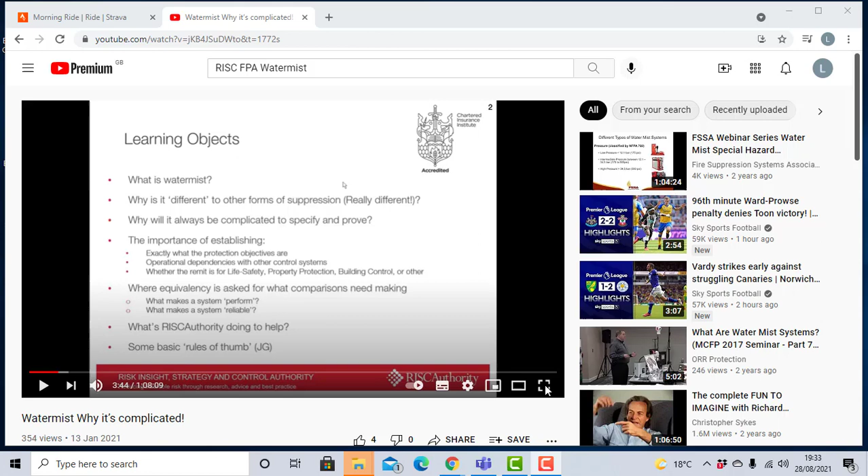Requirements for the certification. We're going to go through what is Watermist, why it's different to other forms of suppression, and I hope if you take nothing away from this, it'll be that. It really is different in the way that it operates, and that really underpins why it will always be complicated to specify and to prove.

Also, the importance of establishing exactly what protection objectives are, operational dependencies with other systems, and how your selection might be influenced by whether you're looking for life safety, property protection, or some other remit to fulfill. So often we see this being left out. People put in a suppression system or an extinguishing system without actually really thinking about what needs to be left should it ever be required in anger.

We also need to address the issue of equivalency, and this is because when we look at our building regulations and how some suppression systems are referenced, often they will cite sprinkler systems and ask for equivalency if a different type of system is to be used. And that's very important, specifically for those who are protecting the built environment and particularly for life safety objectives.

Now, RISCAuthority put in a lot of work trying to clarify the situation for people. I'll go into that, and also provide some basic rules of thumb. Now, these are really things which people may disagree with, but we found that they hold true when trying to specify good systems.

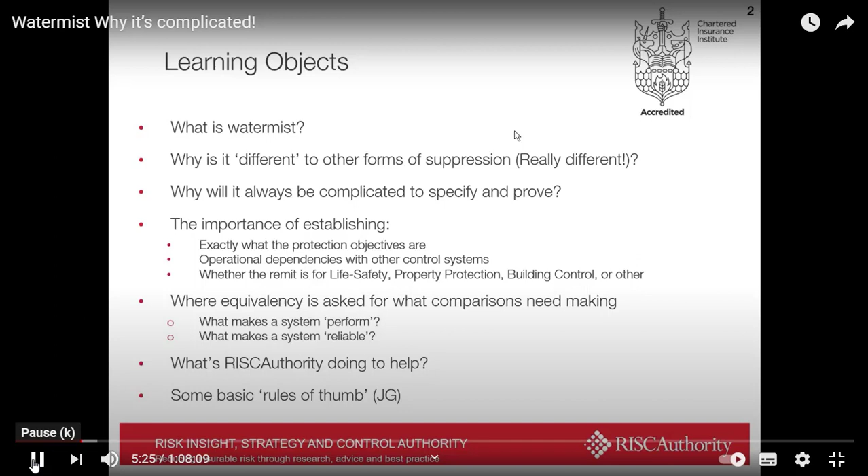So I'm not going to go into the details of this, but what is Watermist? Essentially, it differs from things like sprinkler systems because the water droplets are very finely divided to be much smaller. And in doing so, that gives them an amazing surface area for the exchange of heat and mass over. So if you want to change a lot of water into steam very quickly, the first thing you do is to cut it up as fine as possible and make it available for boiling off. And this is the difference between really a water mist system and a sprinkler system.

In order to achieve this very fine subdivision of particles, generally these systems might operate at much higher pressures than other traditional water systems, and for this you might use compressed gas or high pressure pumps.

The mode of operation is generally described as two-part, thermodynamic cooling of gases during the evaporation process of water into steam, and oxygen reduction as this steam displaces oxygen from the compartment. But many other factors will also come into play, and really that I'll show you in probably more detail than is healthy during the course of this talk.

These systems can be implemented in a number of forms. Traditionally, they've been what we call deluge systems, where the heads will not have a sprinkler bulb in them, or will not have a glass frangible bulb in them, but will actuate on an open pipe system when the pump is switched on. And these can be operated on a compartment or local application protection.

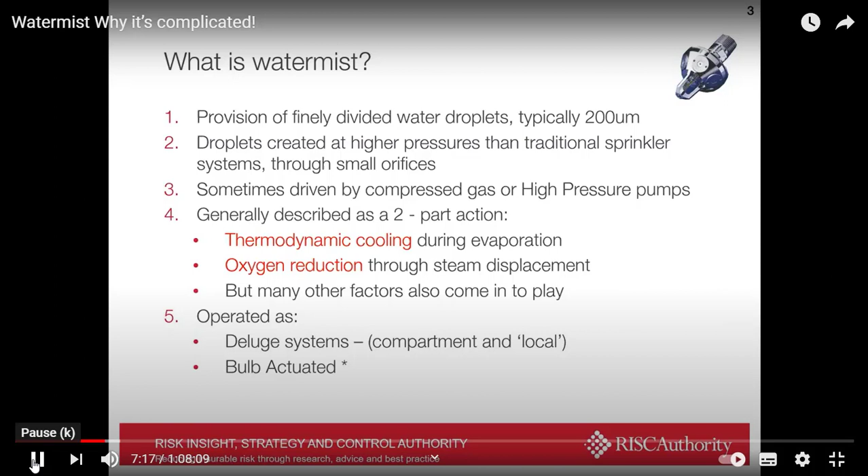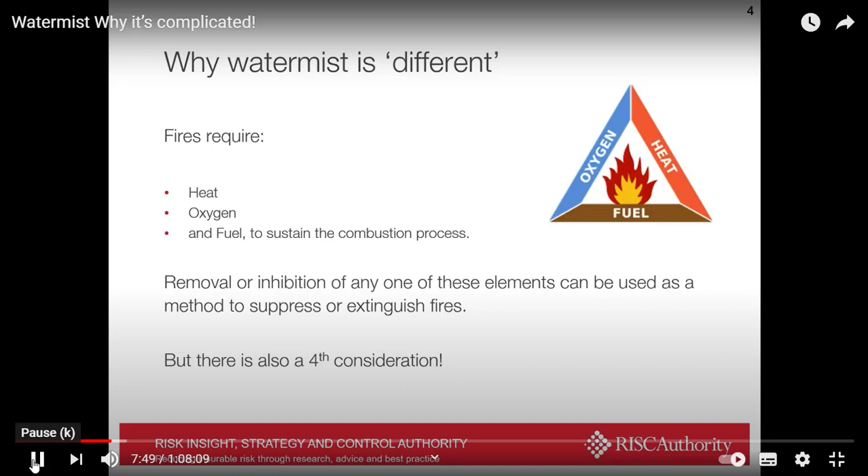And so any suppression system that comes to the fore is going to act on one of those. But it's actually a little bit more complicated than that, because we also do need to consider the chemistry of combustion also. So you may be more familiar with the fire tetrahedron. And really this is about interrupting the chemistry of the combustion process itself.

So whilst we might be used to our O-level chemistry telling us that hydrogen and oxygen mix to make water in a simple equation, in actual fact, it takes place as a series of steps where bonds are broken and remade between the various compounds that are involved. And while they are in this heightened state of being split up, they form free radicals. And in suppression terms, there is an opportunity for other molecules to be introduced, sort of to steal these, so the chemistry of combustion can't complete.

And this is probably most familiar action that we'll move on to think about of some of the gases which have historically been used for fighting fire. So we can really address fire by tackling limiting it of oxygen, limiting it of heat or fuel, or interrupting the chemistry of combustion itself.

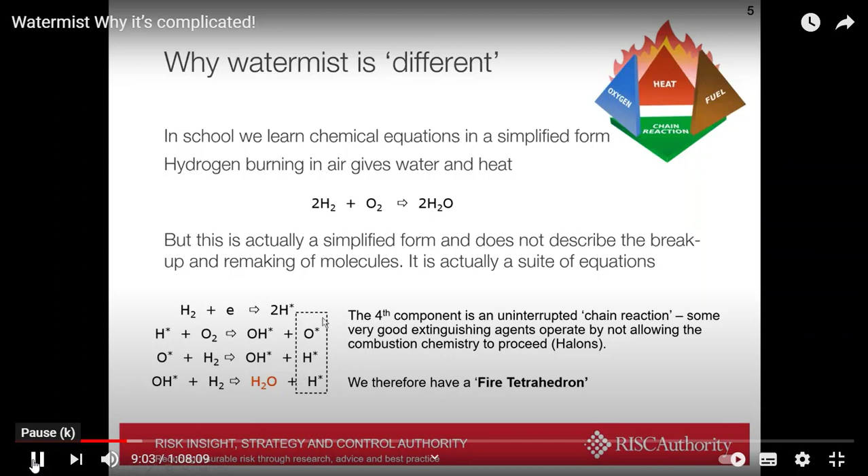Now, I thought it might help to understand how Watermist works by first looking at other suppression systems very quickly, with the popular ones being sprinklers, inert gas systems and CO2 systems, chemical gaseous agents, and the traditionally used gases such as Halon 1301, and this may help us understand a little bit how Watermist works in its own right.

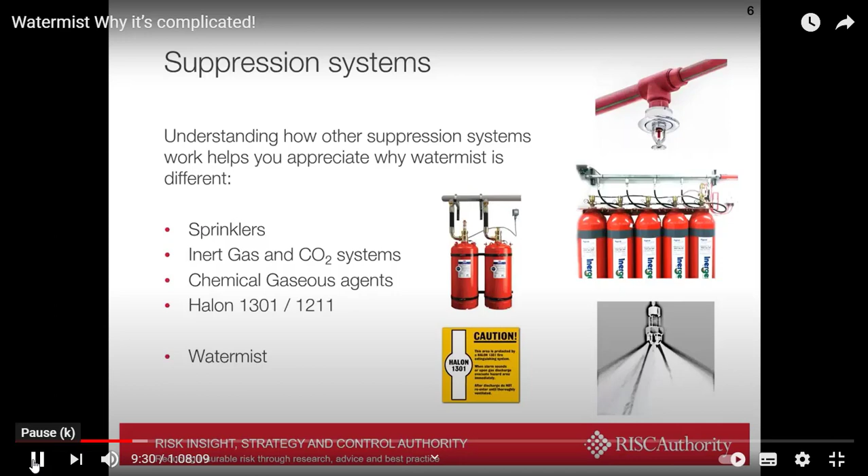So, looking at sprinkler systems, often people are slightly confused about how they work. We're very used to thinking we put water on fire and the fire goes out. But actually, when it comes to sprinkler systems, generally they are fuel removal systems, and generally what they achieve is making stuff that would normally burn, not burn.

So in the case of solid fuels like cardboard, dry cardboard is a fuel, wet cardboard isn't. A lot of sprinkler protection is about pre-wetting the fuel that could soon become involved in a fire, and that determines how water is discharged from them.

Now, if you're protecting some liquid fuels even, this can still apply. Alcohols with water, at a certain percentage, they will burn, and below a certain amount of dilution, they will cease to be able to be combustible. So dilution of alcohol fuels to the point where they become non-combustible still classifies as fuel removal.

And for other types of Class B fuels, fluids like petrol and diesel, again, additional chemicals can be added to the water entering the sprinkler system, such as firefighting foams, which essentially will render the fuels non-combustible or separate them from further participation in the fire by a physical barrier, a skin, or a frothy layer, if you like.

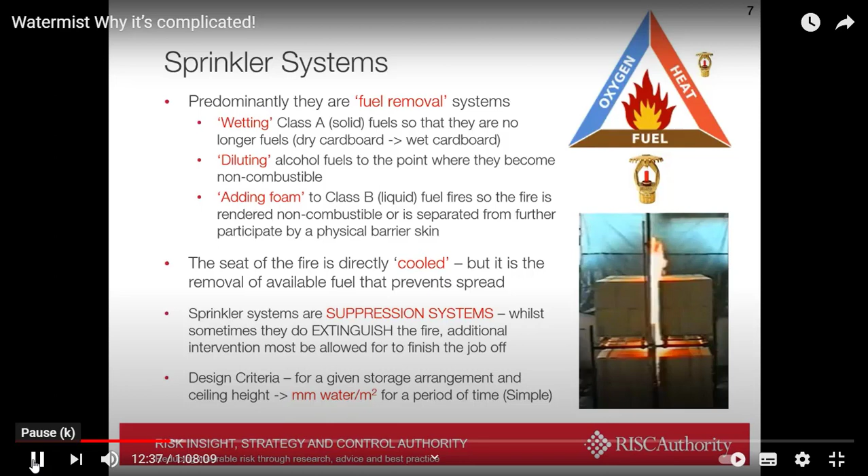We look at the equivalent for gaseous systems or inert gas type systems. These are oxygen removal type systems, where the inert gas displaces around 40% of the enclosure's volume, leaving a residual oxygen concentration that doesn't sustain combustion, and for typical sorts of fuels, that will be somewhere around 12% oxygen and below.

There is some slight variation in the performance of the different gas mixtures, because when you introduce additional quantities, or when you change the makeup of air, it transports heat differently. So there are some differences in performance between the inert gases, but they are very minor.

Now, gaseous systems can't really be suppression systems. They need to extinguish the fire in order to fulfill their remit. And for that, obviously inherent in the design will be precise control over the environment in which they operate. So we need to ensure that the compartment is sealed so the gas doesn't just dissipate out, and we need to ensure that at the time of discharging the gas, we don't destroy the enclosure.

When you inject these gases, if 40% of the compartment's volume needs to exit, it needs to do that in a means which is controlled to an appropriate location and doesn't raise pressures inappropriately. And then having discharged it, there needs to be mechanisms to seal the enclosure and ensure that you can hold on to that gas quantity.

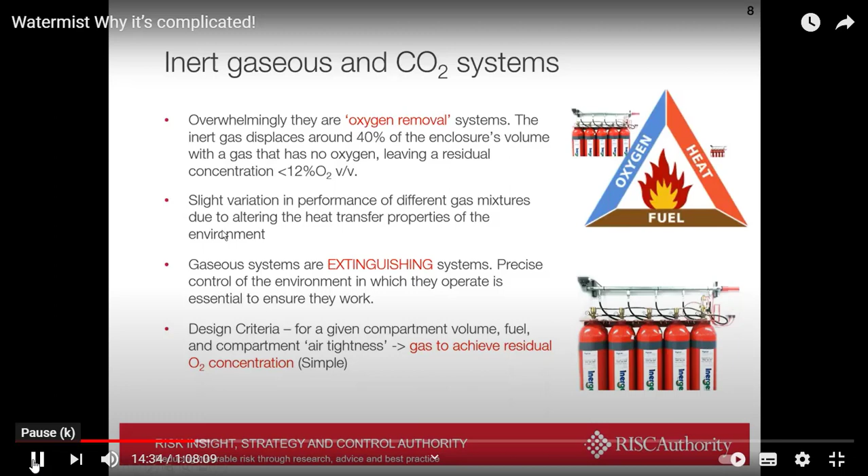So very straightforward. A little more complex with chemical gaseous systems. These are, if you like, gases which are almost like a gaseous version of water in that they can remove substantial quantities of heat by breaking down chemically within the fire. It's a highly endothermic reaction, and there are reports that some of these chemicals also inhibit the chemistry of combustion. Popular trade names that you might have heard of these types of gases might be FM200, FE13, NAF S3.

Many are becoming slightly less desirable due to the greenhouse gas contribution that they can make. But these, again, are extinguishing systems. They need to extinguish the fire in order to fulfill their remit.

With these systems, because generally they are fluorinated compounds, if you don't extinguish the fire with these types of chemicals, it can lead to massive production of hydrogen fluoride, which is a very toxic and damaging gas—something which is highly undesirable. But the design criteria, again, is very simple.

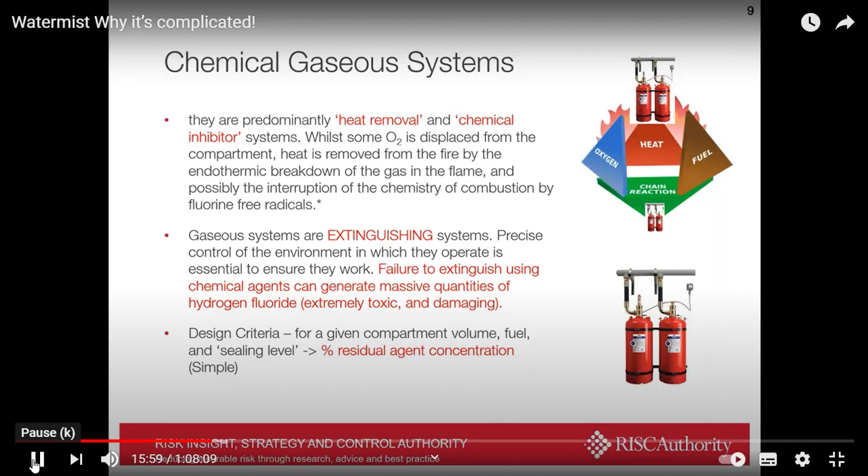For any given compartment volume, fuel, and sealing level of the compartment, you're just looking to get a residual agent concentration of a certain value. So again, very simple design too. And just for future completion...

Halon systems. The halon breed of gases were highly revered chemical inhibiting agents, which in terms of efficiency and performance at putting out fires were quite unsurpassed in their capability. They are, of course, now outlawed under the terms of the Montreal Protocol because they're ozone-depleting gases.

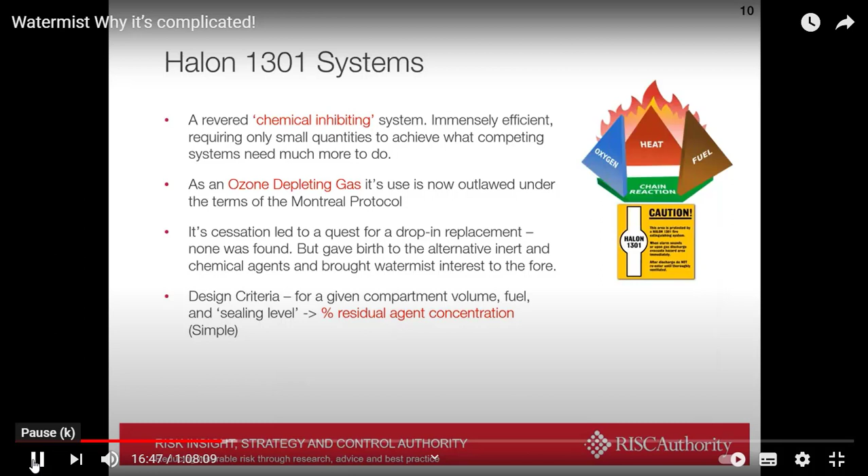And it was their cessation that really led to the development of the other type of gaseous systems which we've just talked about, and also gave birth to really increased interest in the use of watermist, and prompted a great deal of research into this. Again, the design criteria for halon was very simple. So what about watermist?

Perhaps it's best described as though it's an inert gas system, but in this case, the inert gas is steam, and that must be created by the fire itself. Actually, it's this complexity that makes this different from any other extinguishing system, because how it works, how well it works, and the way in which it works is driven by the fire itself—and not just by the fire itself, but the relationship that the fire has with the enclosure that it's within.

Really, scale becomes a very important factor here. A big fire in a small compartment might behave very differently to a small fire in a very big compartment. And even during the life cycle of the fire, these properties can change as the fire grows and shrinks.

Now, in sealed environments where the fire and geometry allow it, it is most certainly an oxygen removal system, and you can achieve great things where the steam displaces oxygen from the enclosure until combustion can no longer be sustained. It can be an extinguishing system, but this can be very difficult to ensure due to the level of control that you need over the environment and how everything goes. But I'll demonstrate that very clearly to you shortly with some results from some experiments that we conducted to demonstrate these points.

It's obviously a very effective gas cooling system. We mentioned before that it was very finely divided droplets delivered universally throughout the compartment. And in that, they can be fantastic at preventing flashover, keeping things cool, and keeping the environment well suppressed. But the design criteria, for the reasons given, are very complicated.

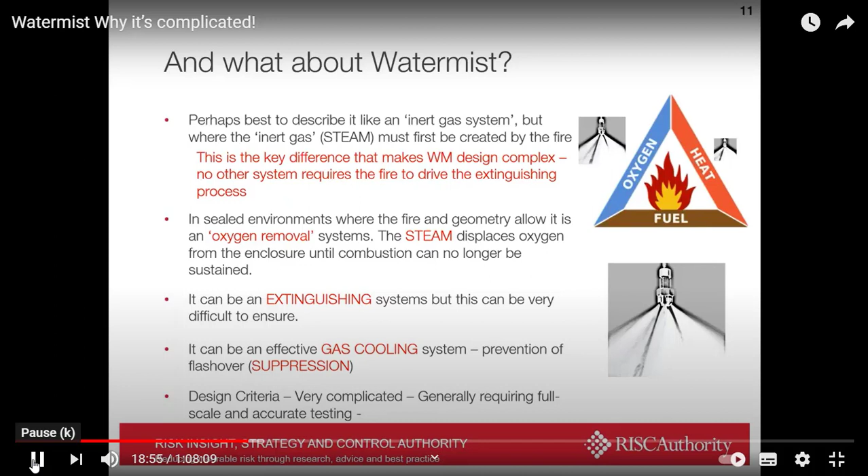And historically, watermist systems need to be justified really by full-scale, and more importantly, accurate testing of a type reasonably similar to the end application.

So if anyone sort of asks about, how does it work? Is it by oxygen depletion? Well, sometimes it might be by cooling the fire, perhaps a little fuel removal if it's specifically designed to control ignition sources. Again, if that's something desirable, it can be designed in.

Deployment of foam—generally watermist systems are not foam enhanced, even though it'd be lovely to do that, because, as you'll see, small fires can be quite troublesome for them. But it can be made to work that way if deemed appropriate.

And gas cooling, very effective at that. But it can be all or some of these together individually, or even change throughout the lifespan of the fire as it grows and shrinks.

And actually, we do see that cycling of fires during watermist discharge is commonplace also, as a large fire can really drive itself to the point of its own destruction, or nearly, but then as it shrinks down, it starts to generate less steam, and then depending on the ventilation arrangements, it may recover quite considerably also.

But another common question: is it like a sprinkler system or a gaseous system? Sometimes all I can say is it's a bit more like one than the other. But again, it depends very much on the situation. The key difference is that the fire and its relationship with the enclosure drives the extinguishing process, and all these things vary.

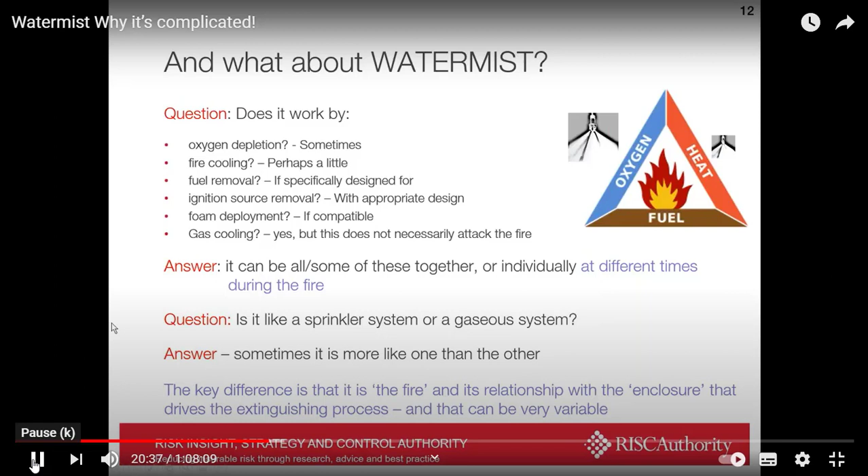So I said that I would give you a good example on some of these facets.

Here was a very simple series of tests that we did, but they were very well controlled in a 100 cubic meter enclosure, very well sealed rig, but we can adjust the ventilation by removing sections of the door panel, the blue blob on the left there with those dots, that's just a section door panel. We can operate with different numbers of Watermist nozzles, use a range of fire sizes, and allow the fire to burn for different periods of time before the Watermist system operates. Hopefully the results from this will show you clearly how counterintuitive some of the operating modes are.

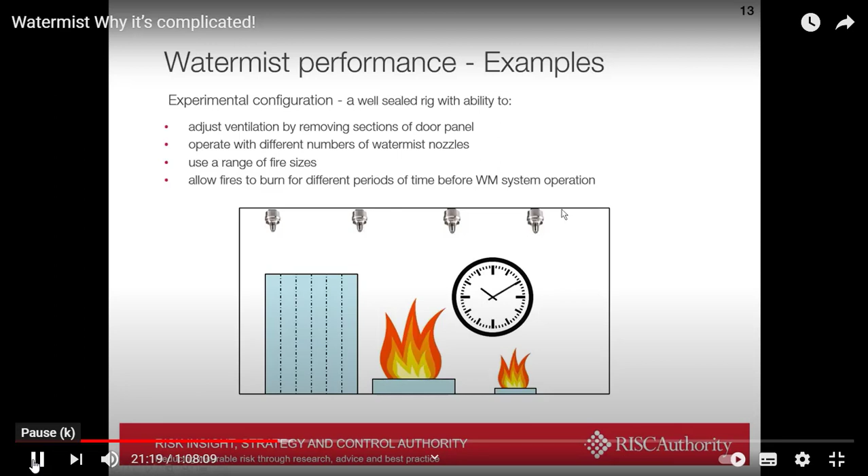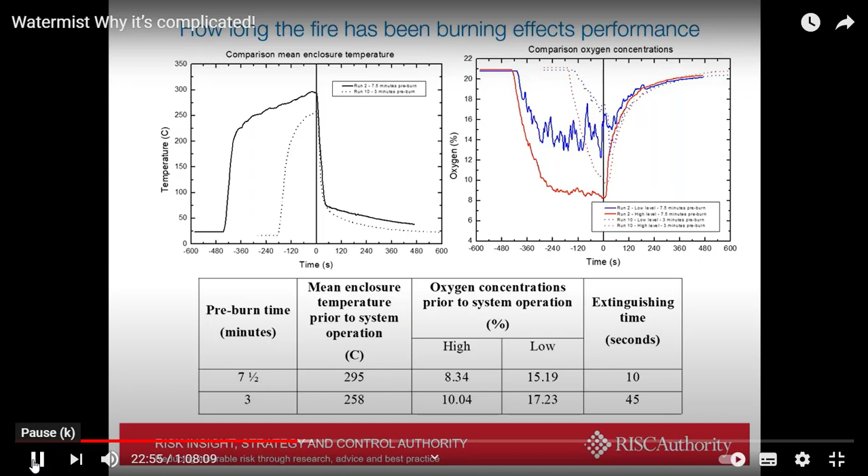When we activate the system, we see a difference in performance in the time to extinguish that fire. Burning the fire for longer, we extinguish it in 10 seconds, whereas burning it for a shorter period of time, it takes 45 seconds to go out. I think that's all very logical, but again, counterintuitive. We're rather used to detecting and tackling fires earlier because they're easier, but here's a case where leaving them longer makes them easier for this type of system.

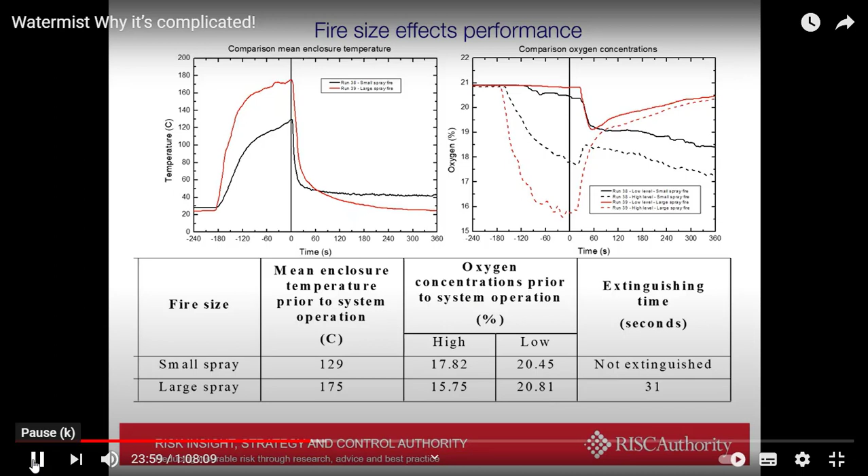And the difference here is not just a change in time, but for this ventilation configuration, it's the difference between extinguishing the fire and not extinguishing the fire. Again, this is a deviation from possibly what we're used to. We're used to systems which do not really behave in a sort of binary fashion - we like to see a change of performance, but not a major difference, such as whether it gets extinguished or not.

Ventilation, another key feature for systems such as this. We can see that they're inherently linked in their ability to put out fires to the oxygen content of the enclosure and how they can drive it down.

So here we have, if you can remember the schematic before, where I've removed a series of door panels - 2, 4, 6, and 8. What that changes between these tests is not only the temperature of the enclosure, because the fire burns less efficiently - you can see that in the left-hand graph, actually this is more about holding on to heat with the highest temperatures for the least panels removed. But more importantly, on the right-hand graph, it describes how the residual oxygen concentration within the compartment is for the different ventilation levels.

As we remove or increase the ventilation of the compartment, you can see the extinguishing time increase from 14 to 27 to 35 seconds, to the point when 8 panels are being removed, it doesn't extinguish at all. So again, we reach a threshold, and it's a question really of whether we would be able to describe accurately in any design manual when this happens, if extinguishment is an important facet of the overall design.

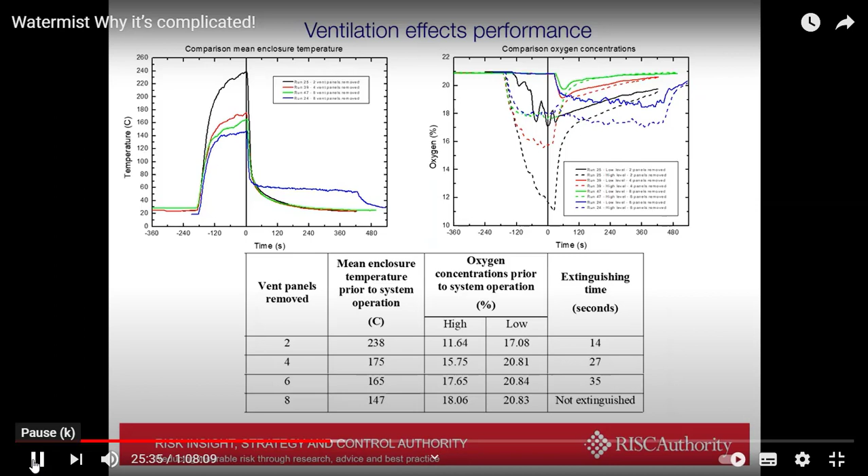And that's another thing that we need to discuss later on in this talk. People do seem to fixate on extinguishing fires, when actually that might not be what is needed at the end of the day.

Watermist density - I mentioned we can also change the number of nozzles operating within a compartment in this well-controlled environment. You can see as we changed from 4 to 6 nozzles on small and large spray fires, the more water you put in, the lower you can drive down the oxygen content of the compartment, and larger fires do that better. On a small spray fire with 6 nozzles operating, the fire will be extinguished in 52 seconds, but if it comes down to just 4 heads operating, we reach a threshold where the fire doesn't extinguish.

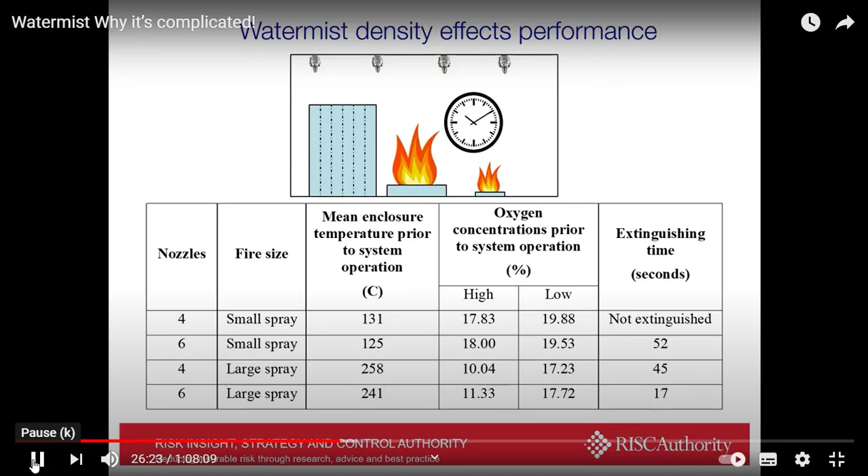Hopefully you've managed to get your head around that - it demonstrates just how confusing things can be. Fires that have been burning longer are hotter and have less oxygen available, and may therefore be easier to extinguish. Fires which are bigger are hotter, consume more oxygen, and generate more steam, so they may also be easier to extinguish. Fires with less ventilation cannot replace the oxygen displaced by steam as quickly, and may therefore be easier to extinguish. Fires subjected to more droplets can produce more steam, which may benefit extinguishment also.

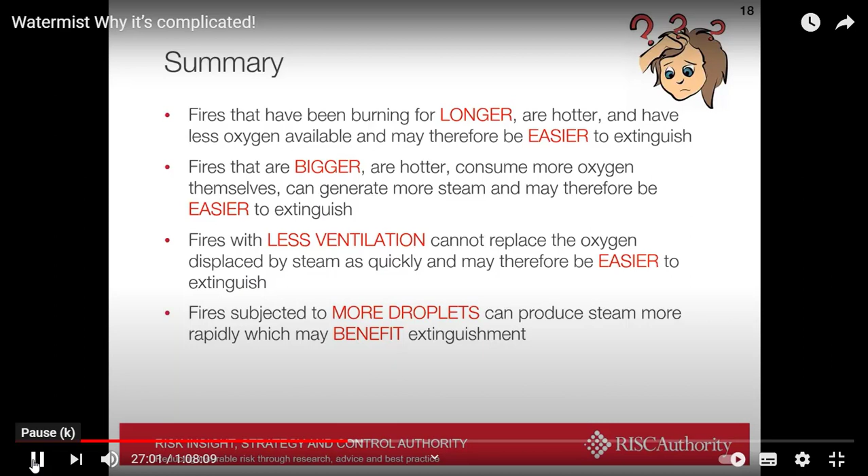The problem with criteria like this - longer, bigger, less ventilation, more droplets - is these are very difficult things to describe in any given design manual, because they are related to the fire size. A big fire is only big in a compartment in which it looks big. In a much larger compartment, it may be a very small fire. So it's this interplay that makes it very complex indeed.

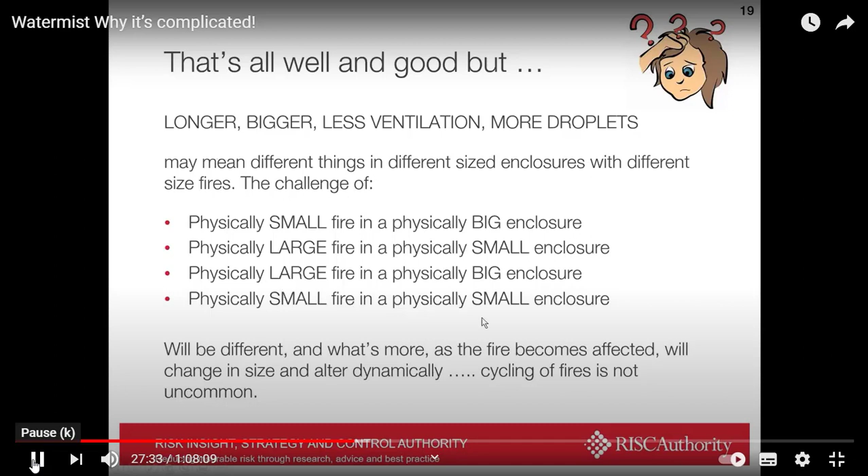I think we've probably laboured that point long enough. I just want to show you what this actually looks like in practice. This is some work we did for the military, and I just want to show you 3 examples - this was for a very specifically designed Watermist system for them. I'm hoping that this will run.

This is where it's worked beautifully in rehearsal. But we might be having a little problem now. Sorry about that - I may just have to describe these to you.

Basically, in a very large compartment, this was for a marine application - we designed a system for the military, for the warships. In the first video on the left-hand side, that should have shown you very nicely how hidden fires, under a metal table - these images are taken with thermal imaging cameras - a very large fire in a completely obscured situation. If the fire is large enough and the compartment is well sealed enough, that fire can be successfully tackled because of inerting of the atmosphere and reducing the oxygen to a point where combustion can no longer be sustained.

In the middle one, this is a small fire, but in this case the ventilation of the enclosure is such that the small fire will not go out by itself. But this particular Watermist system we enhanced with foam, so that gets taken care of by foam.

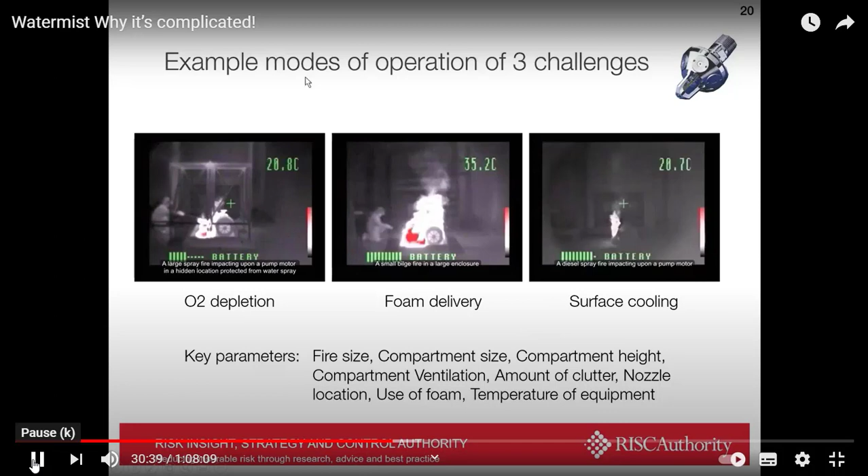I'm sorry I couldn't bring you those videos. And I also don't - oh, there we go.

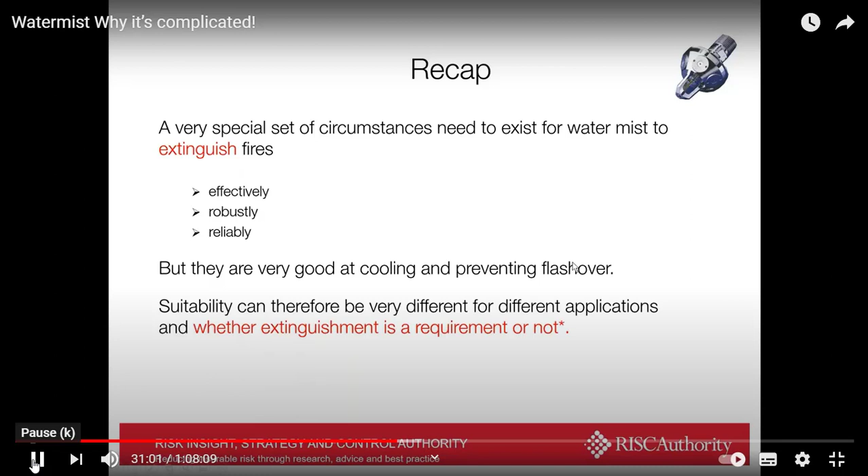So to recap, a very special set of circumstances need to exist for Watermist to extinguish fires effectively, robustly and reliably, but they are very good at cooling and preventing flashover. Suitability can therefore be very different for different applications, and whether extinguishment is a requirement or not. Now, we need to consider this very carefully.

Watermist is seeing a wide range of applications, some more familiar than others, but it's vital that you understand what it seeks to achieve. So I've just roughly categorized these as life safety protection, building regulations compensatory feature, property protection, and business resilience endeavors.

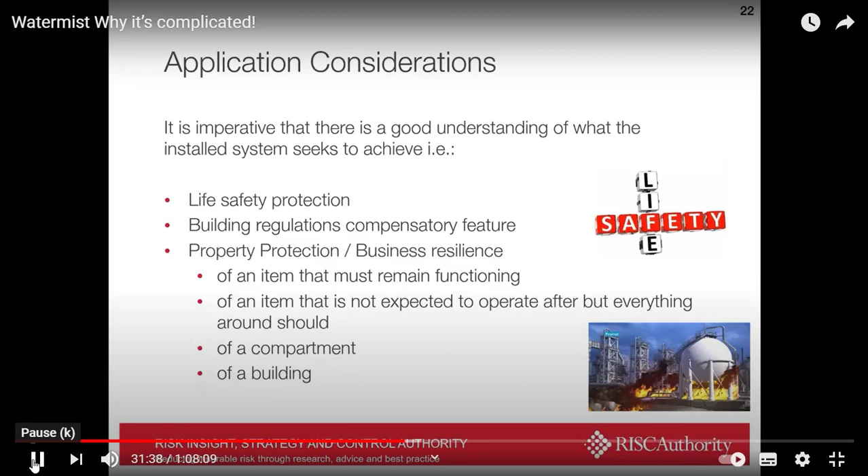And that might be of an item which must remain functioning, a local application if you like, or of an item where it may be destroyed in the process, but that's okay, as long as everything else around stays intact, or protection of a compartment or protection of a building.

Now, for each of these, it's imperative to also consider if extinguishment or suppression is appropriate, and if we talk about suppression, how long the system must be effective for. This is generally a conversation about who's coming up to help with it, the fire service, or what the secondary measures are to finish off the fire, and also how resilient the system must be to perform.

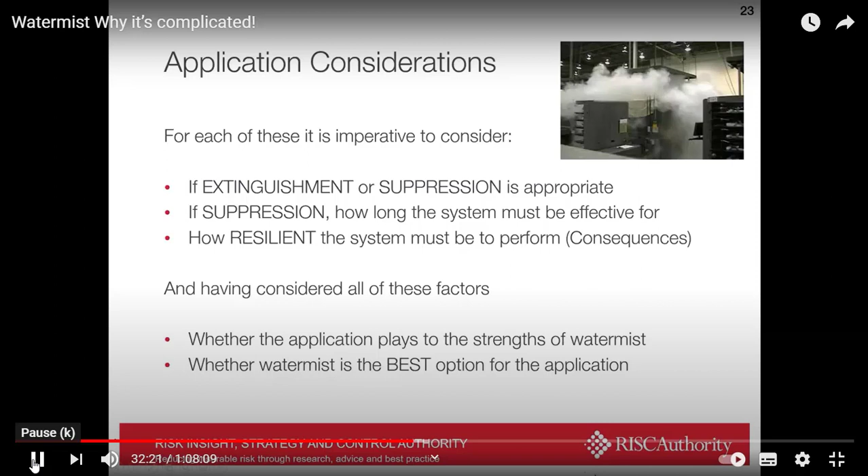And having considered all those factors, whether the application plays to the strengths of Watermist, and we'll talk about those in a moment, and whether Watermist is the best option for the application itself.

Now, I think hopefully you've started to get a good handle on what the strengths are of Watermist. Very good on high heat output fuels, and particularly liquid fuels, hot environments, enclosed environments. This optimizes steam production and containment of that steam for displacement of oxygen as well. Best for small compartments with low ceiling heights, because that can also maintain the momentum of the droplets themselves.

Around a fire, there are a lot of repelling forces to drive droplets away, and Watermist systems overcome this by generally injecting them in a fairly fast and furious fashion so that they can overcome these repulsive forces.

Certainly a strength is direct application, very good environmental cooling, and they can be good on hidden fires if the fire is large enough and the compartment small enough in relation to each other to globally reduce oxygen content, and they're very good at gas cooling.

The weaknesses: ventilated spaces, as hopefully we demonstrated there. You can cross a threshold so that a lot of the benefit disappears all too quickly. High ceiling heights, as I said before, where the momentum of the droplets gets lost with distance.

Small fires can remain remarkably resilient against water mist systems, because they don't have the energy to drive the circumstances for their own demise.

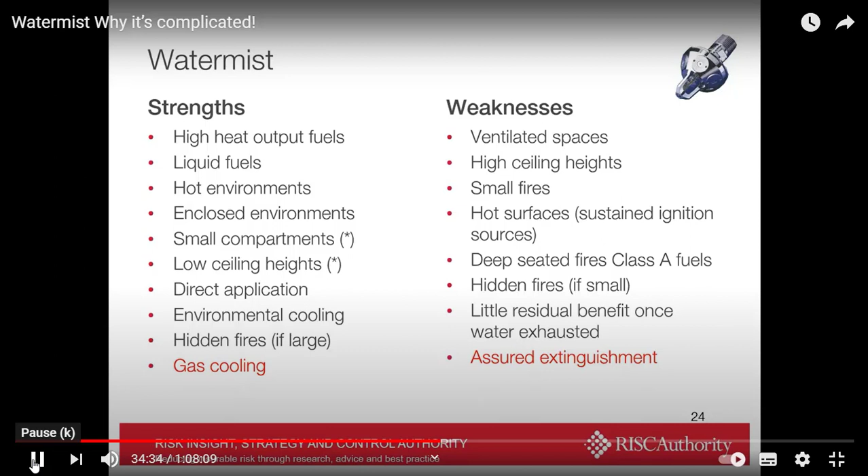Hidden fires, if small. Another thing to consider is that once the water supply to a water mist system is exhausted, there can be little benefit thereafter, because very small quantities of water have actually been put down. Their weakness is really that trying to assure extinguishment can be quite a challenge, and we'll keep revisiting that.

But that said, for life safety purposes, we've seen some very good implementations. We know that they have a facet of exhibiting excellent atmospheric cooling, very good for flashover prevention, and really preventing fire growth in small domestic residences.

An aid to timely detection and evacuation, and generally these are specified without an expectation or requirement for property protection, as extinguishment is not required. It's more about getting people out of the building, and they can do that very effectively indeed.

And obviously, post-Grenfell, they've been proposed as a good measure for assisting the escape of occupants who can be quite remote high up in high-rise buildings, and we've seen some good examples where that certainly is a feature.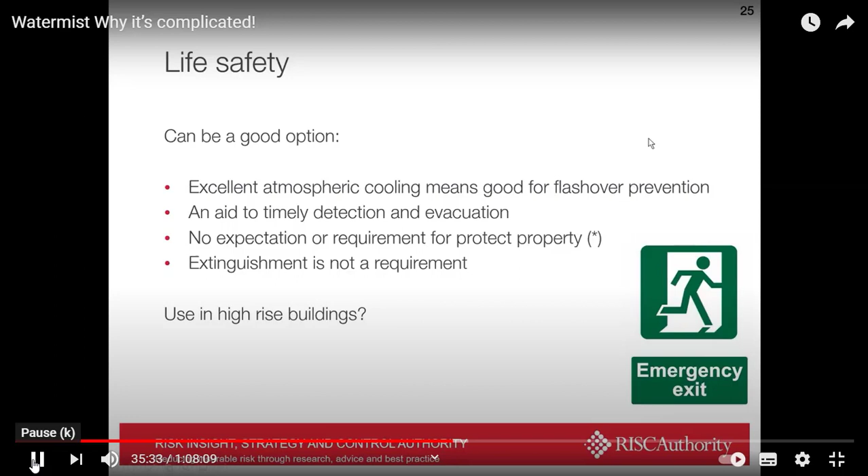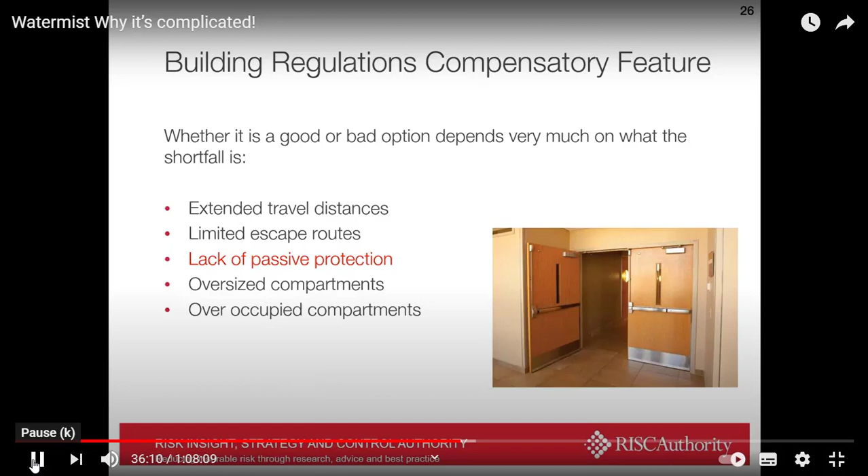I think decisions as to whether water mist is appropriate here really depend very much on considering each of those in turn for appropriateness, given the strengths and weaknesses of what we've already discussed. But I won't dwell on those—it's a very complex area in its own right.

And the reason there is quite obvious. In the marine environment, we have very well-sealed compartments. The fuels that they use generally lead to very large instantaneous fires, and it all plays to the strengths of water mist, as we've seen as being very effective.

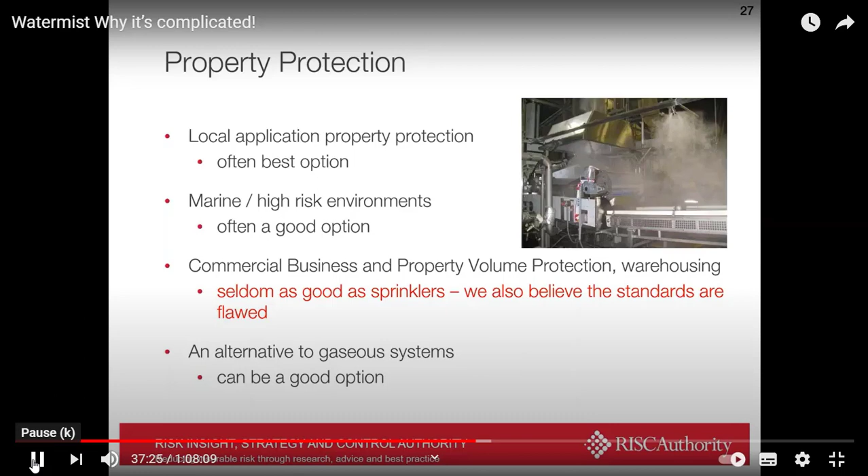And this is where we see most challenges, and often we see facilities being put in where sprinklers really would have been a better choice after all. I'll go on to some of the reasons for that later on. But certainly they can also be considered as a practical alternative to where gaseous systems might be deployed. They can be a very good option, subject to the fires being of the right type to play to its strengths.

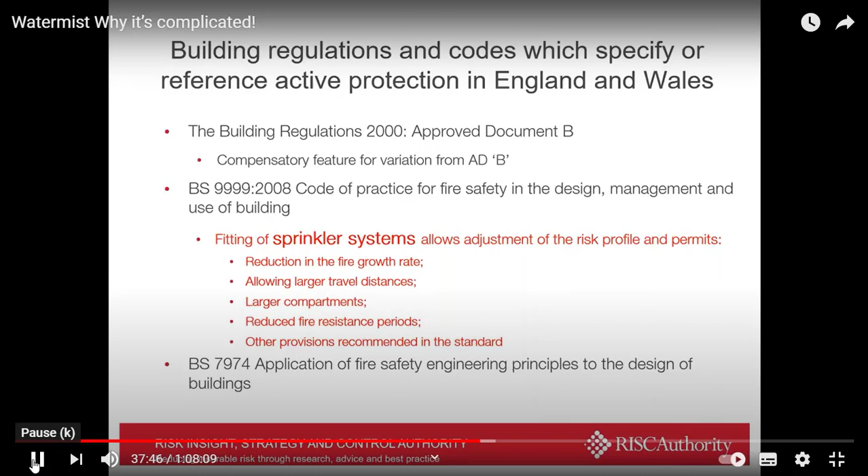I won't dwell on this, but building regulations do talk about water systems, generally in terms of sprinkler systems. They can be used to compensate in various codes, to reduce the fire growth rate, allow larger travel distances, larger compartments, reduce fire resistance periods, etc.

And also, where they have been mentioned, this is a phrase out of BS 9999: where it is proposed to modify the risk profile by using a fire suppression system other than a sprinkler system, it will need to be demonstrated that this system achieves the equivalent standard of fire protection and reliability.

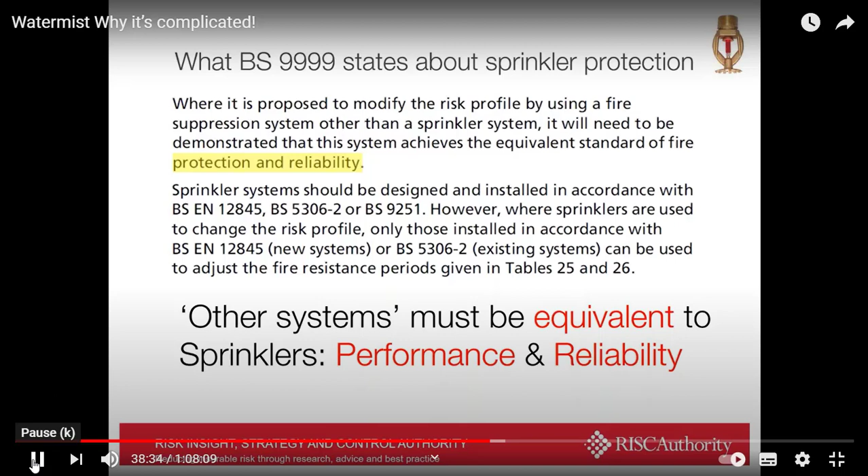Now, the fire protection bit is quite easy to generally demonstrate in the laboratory. You can tweak and play with any system to make it good. But reliability is a very different thing altogether, and that is generally earned through years of refining and tweaking to increase the development of pedigree, I suppose, of a system. But if we hold on to that thought, we probably need to consider what makes things reliable.

Now, I don't want to enter into a sprinkler versus water mist debate, but it's sort of inevitable in some respects to visit here. It's a good benchmark because sprinklers probably are the most reliable suppression system that we have. Generally, when asked to operate within the figures, most analysis shows them to be over 90%, 96% likely to function properly when called upon to do so, which is an enviable figure which no other type of suppression system comes close to. But in the early days, sprinklers weren't perfect either.

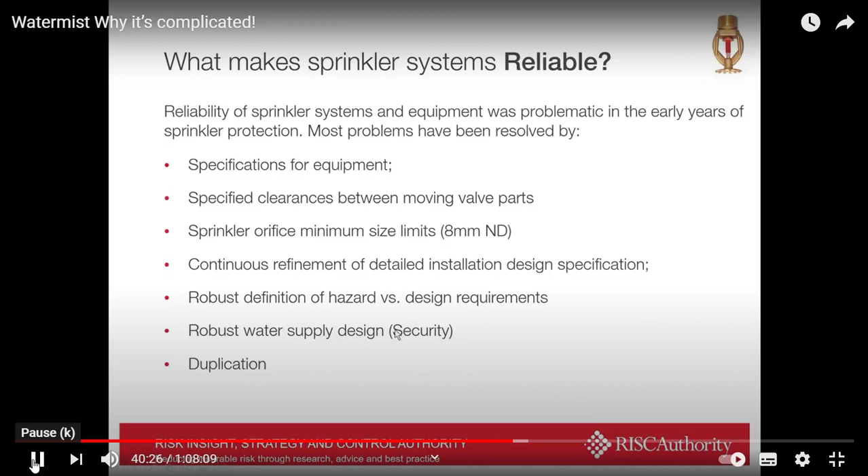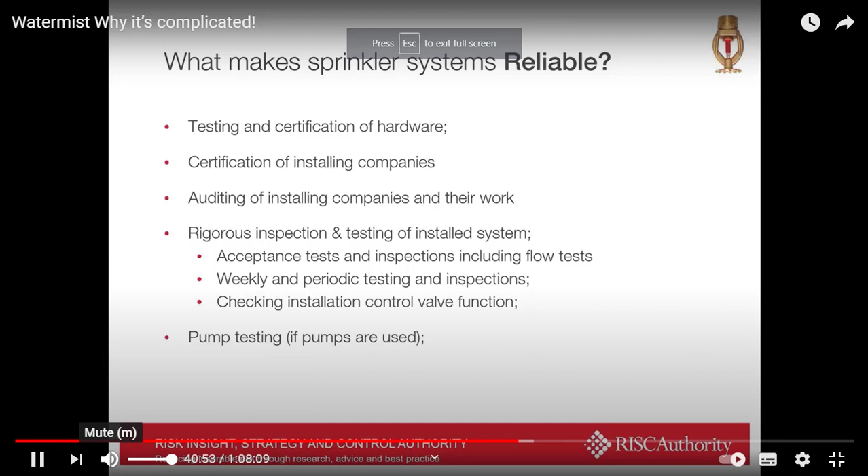There's also testing and certification of hardware, certification of installing companies. There's auditing of the installing companies through things like the LPS 1048 schemes and FIRAS schemes. There's also rigorous inspection and testing of the installed systems by way of acceptance tests, flow tests. There are weekly tests done, pumps are run up each week as well, and there's checking of installation and control valve function. So as you can see, it's an all-through-life solution that has been required to produce reliability within sprinkler systems.

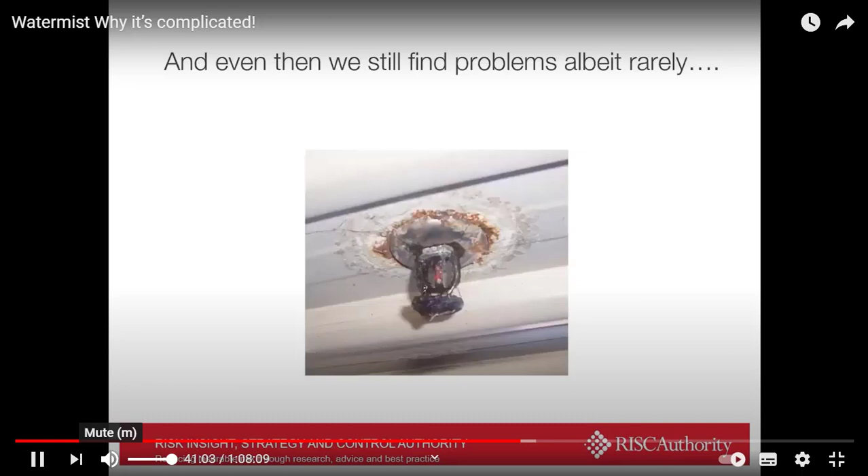But even then, we still find problems, albeit rarely, but it does take a lot to achieve these levels of security. So I just want to do a few side-by-side comparisons.

Probably one of the primary differences between sprinkler and water mist systems is actually the extent of protection. When I'm confronted with people saying I don't know whether to put in a sprinkler system or water mist system, it's more than just talking about the technology and the methods with which it puts out fires. In specifying a sprinkler system, you are signing up to a list of rules that tells you every area of the building that has to be protected, even the hidden areas, the voids, the cavities, if they contain combustible things. It is basically a total building protection system that is being signed up to, not just the fact that you're using a nozzle that puts out big drops.

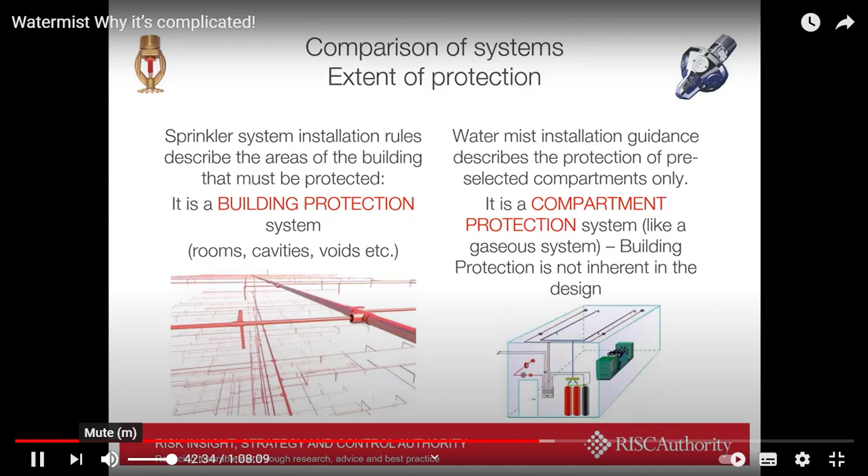But when you specify a water mist system, it really is for compartment protection, and generally it's down to the user to determine what areas, what subcompartments of that building should be protected. So there is a key difference there. With a sprinkler system, if you see one in a building, you'll know that if there are voids over a certain size with combustible content, the sprinkler system will be running in those invisible places too. The same is not inherently encompassed in water mist design by default.

When you look at the hardware that's used, I mentioned Victorian architecture on the left-hand side. That's a cutaway of a sprinkler control valve, a large flap that lifts away, generally revealing a hole around 4 inches in size for the water to get through.

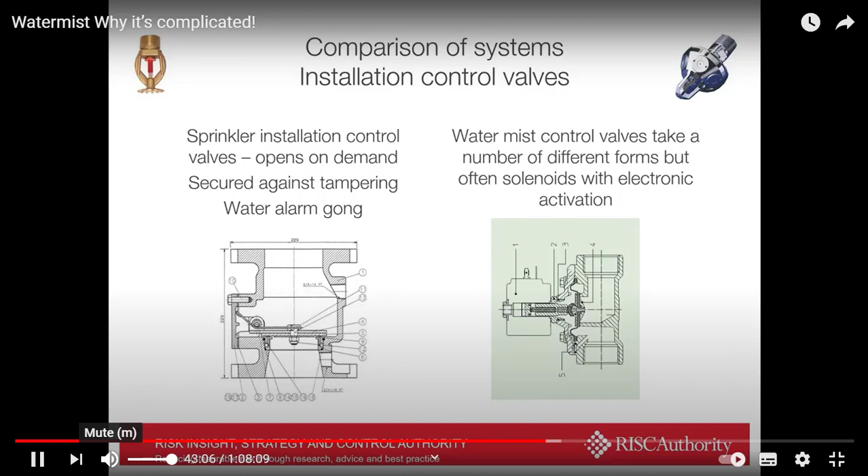But Watermist systems require much lower quantities of water, but depend on much smaller orifice type equipment such as solenoid valves, which have a much higher failure rate than sprinkler alarm valves.

Looking at orifice sizes, we mentioned the minimum orifice size for sprinkler systems is around 8 millimeters, and as such they get tested every 25 years, and the products are interchangeable. If your heads need replacing, you can go to any number of manufacturers and put their head in place of it.

Watermist nozzles have very much smaller orifice sizes, and we know in our laboratory, even trying to be fastidiously clean with our water, we do get issues occasionally. As such, these need testing every 3 years, and they're not interchangeable between systems. You do need to go back to the original OEM provider for nozzles if more are required.

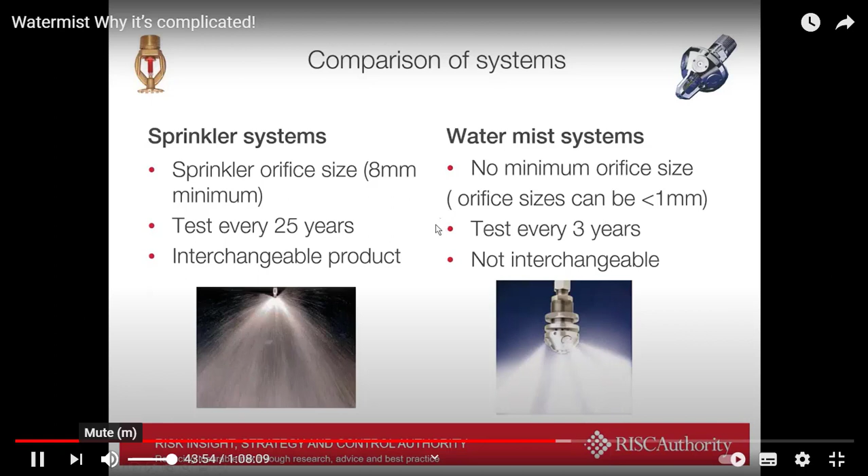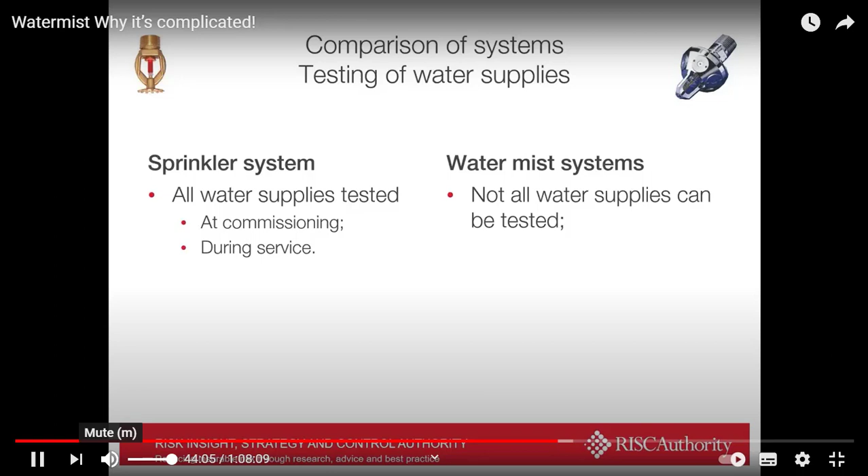Testing of water supplies is also a difference. Sprinkler systems are designed so that we can test the water supplies, and they are tested regularly. With Watermist systems, we find sometimes that's just not possible.

Duration of water supplies, for a sprinkler system, is defined by the hazard, but 60 minutes, 90 minutes, and even 120 minutes are not out of the question. Even after that water gets exhausted, were it ever to, the amount of water that's gone down can still have a controlling effect on the fire.

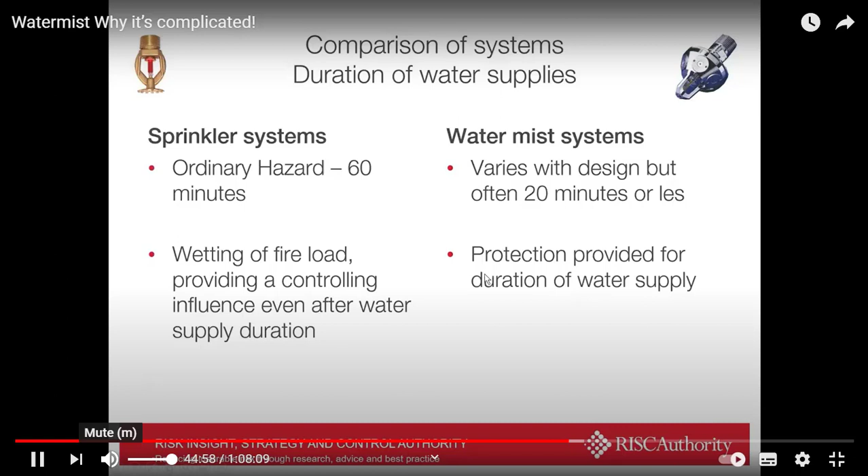In Watermist systems, the durations are generally very much smaller. They may be defined by a standard, but often by the installer or manufacturer themselves, determined through testing. But obviously, in putting so little water down, once the system generally finishes firing, there can be little residual protection of that space thereafter, if nothing else has come along to intervene.

And then finally, water application rate. We've got it specified against hazard for a sprinkler system, and as I've already described, it's really dependent on the system itself for Watermist, as few equivalent type test procedures apply.

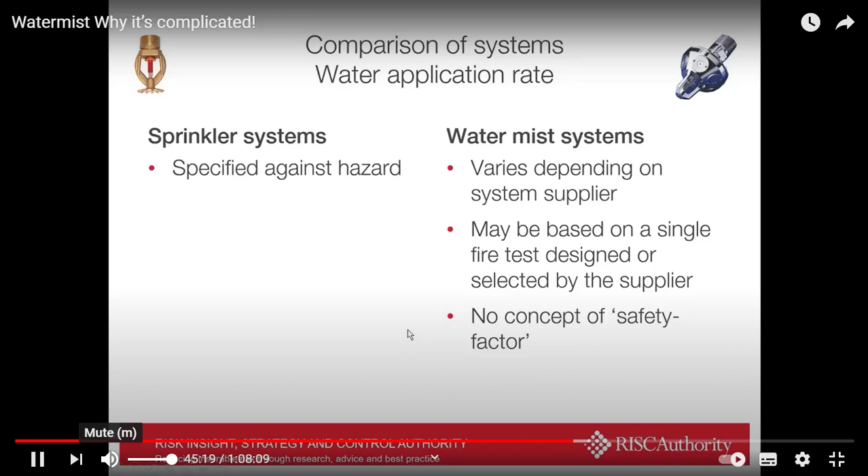So, sorry, in that slight whirlwind, I hope it wasn't too confusing. Let's look at what makes reliability important. Currently there's little by way of codes or standards to take account of whether Watermist systems will have many of the features that we know make sprinkler systems effective for the long-term protection of property and business.

I have seen justifications of Watermist systems which have basically said that sprinkler systems have a tank, a pump, lots of pipework and nozzles, and they're 96% effective. Our Watermist system essentially is made up of a tank, a pump, some pipework and some nozzles, so we can infer the same level of reliability. Totally wrong, but I do see it written down occasionally.

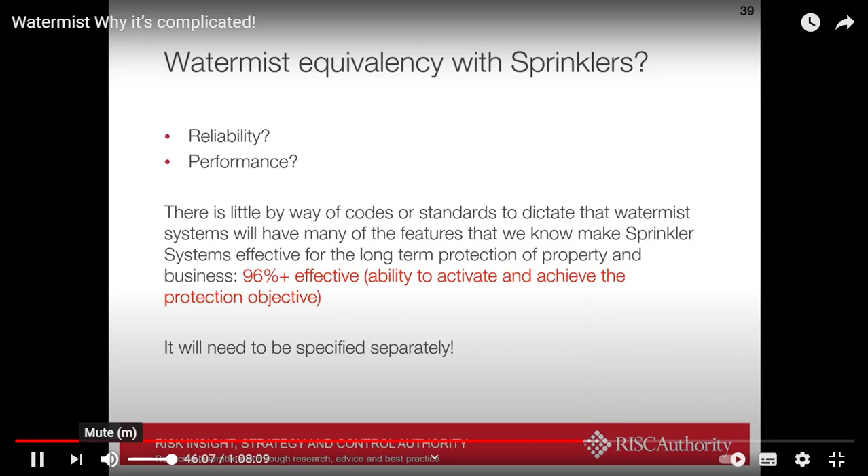So what's RISCAuthority and FPA done about this? Insurers, and many of you are listening in I'm sure, sought some guidance as to how we could help while there is a lack of guidance out there.

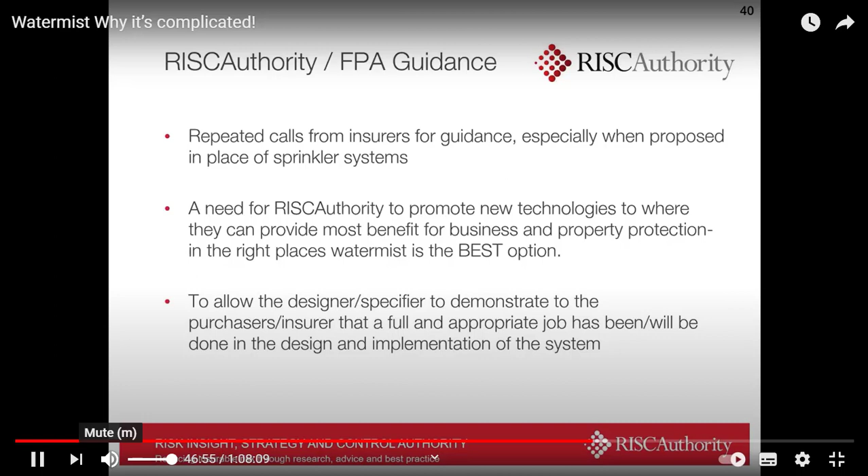RISCAuthority does have a remit to promote new technologies where they can provide most benefit for business and property protection, and we like to see it go into the right places where it's actually the best option. What we've produced is a suite of questionnaires which hopefully will allow designers and specifiers the freedom to really demonstrate to the end user why this is the best technology to use at any given time.

These are freely downloadable from the RISCAuthority website. There are 3 of them to cater for the 3 types of Watermist system that we see being installed. IQ1 is the Watermist questionnaire for building compartment deluge systems.

That's the use of open head nozzles used to protect compartments in the same way that a gaseous system might be used. These are typically things that we see in some factory environments, but certainly greatly in the marine environment. IQ2 is a Watermist questionnaire for local application systems, protecting deep fat fryers and cooking equipment, can be very effective there. And IQ3 is a special one.

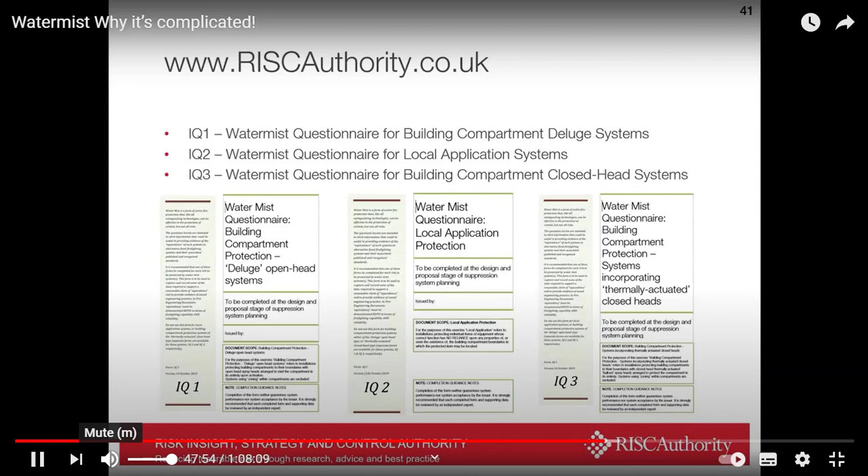This is a Watermist questionnaire for building compartment systems which use closed head systems. These are things with bulbs in them. And there's some very good reasons, which I'll explain very shortly, as to why we think that's important.

Why have we done questionnaires and not produced guides or installation rules? Well, Watermist function is complex, as you've seen, and there are fewer standards than there are for sprinklers existing to rely on for their installation. I hope you've seen the science is quite complex here, and to describe for every eventuality is almost impossible. What the questionnaires do is check that all the design elements have been considered, that the usual risk control logic has been followed, properly recorded, and is owned by someone.

And we felt that was the only practical approach to go to.

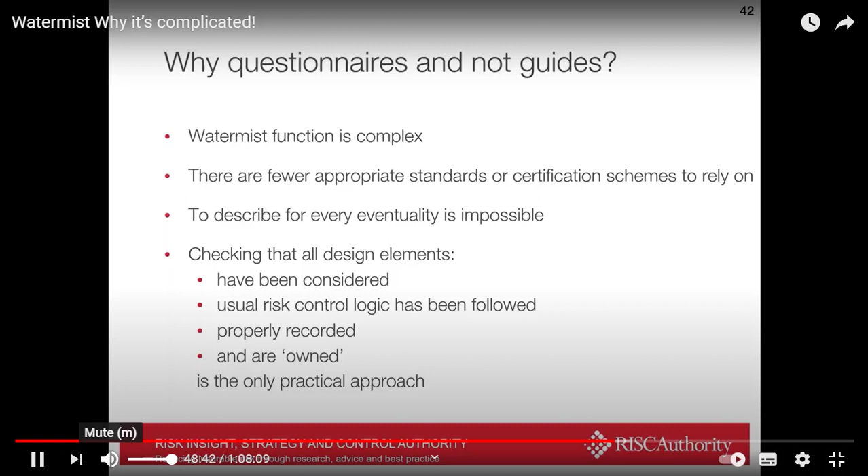Now, based on some of the things we've seen when doing forensic examination of failures of all types of suppression systems, not just watermist, the first and key issue is that design intention is not properly understood, be it about whether it relates to property protection or life safety. We see something more fundamental: an assumption that the system would extinguish the fire, but it didn't, and it wasn't associated with an alarm system. So not only did it not extinguish the fire, it also didn't raise an alarm, and the building carries on to burn down anyway. These are quite fundamental issues. Risk is never properly investigated or understood.

We see inappropriate use of systems applied to different applications, with system design never validated against an appropriate risk. We've been through a period where we see a lot of onshore water mist applications being justified by experiments conducted for the marine environment, which use very different fuels, and the enclosure details are very different also. You need to question whether that is appropriate or not.

Also key is that system design doesn't necessarily consider all modes of operation of the equipment it's protecting. We've seen some very large losses where the system probably would have worked fine had the equipment been configured as normal, but fires don't generally manifest when things are normal. Fires happen when abnormal stuff happens, and maybe if a fryer hood has been lifted or something, the system fails to operate because the ventilation details have now changed.

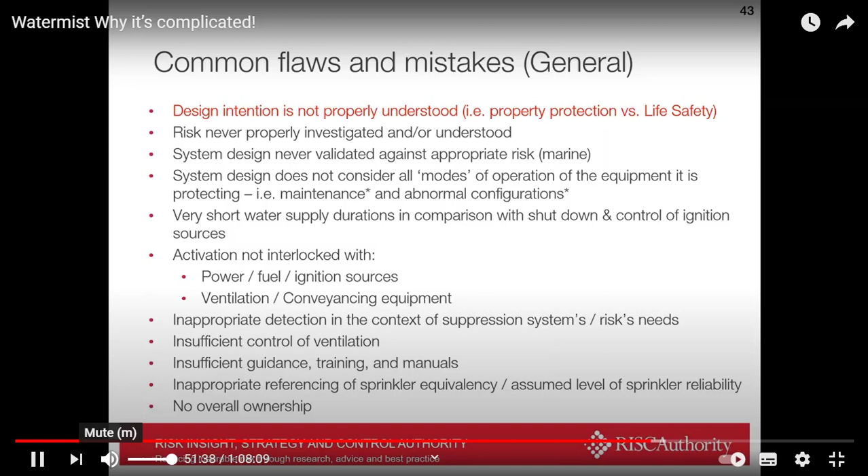Now, I know that's a bit of a gripe page, but I thought I'd distill it all into one. Where I do have a concern is when it comes to very large area systems with a large array of heads, which are closed heads, actuated by the popping of a sprinkler bulb.

Now, it may not be known to many people, but sprinkler systems are deliberately designed not to cool the ceiling gas layer, because the temperature at the ceiling is the only means by which the sprinkler heads can communicate with the size of the fire below. So if the next sprinkler head in an array needs to go off, it needs to understand what temperature the fire is and whether that bulb is needed. So the heads are designed so they don't cool the gas layer, and a great deal of effort goes into sprinkler design to ensure that is always the case.

However, one of the concerns we have as FPA is that in the water mist arena, commercial protection standards have been written using the same bulb standards and the like, but we mustn't forget these are very small droplets, and these are essentially gas cooling systems. We don't believe sufficient work has been done to consider whether one head activating can impair the ability of the next head to operate, even though it's required, due to cooling of the gas at this height. So we currently feel that commercial water mist installation standards for systems of this type should be treated with great caution.

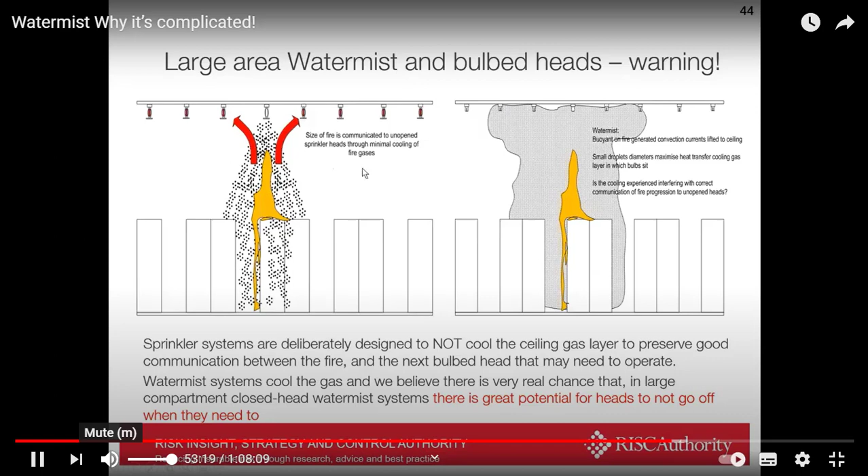So, in summary, just to close out, water mist can be the best protection option for many applications, but not all. It is imperative to fully understand all performance factors pertinent to meeting the design requirements and assess whether what the technology can achieve is better than all others.

In the use of the questionnaires, it only asks details, only questions that should be answerable by anyone competent to design and install a system. And really, if people are struggling to justify the system or to complete the questionnaire, that should serve as a warning to you—that not all the bases have been covered. It isn't simple; you do need to do the detail, or be convinced that the details has been done by others.

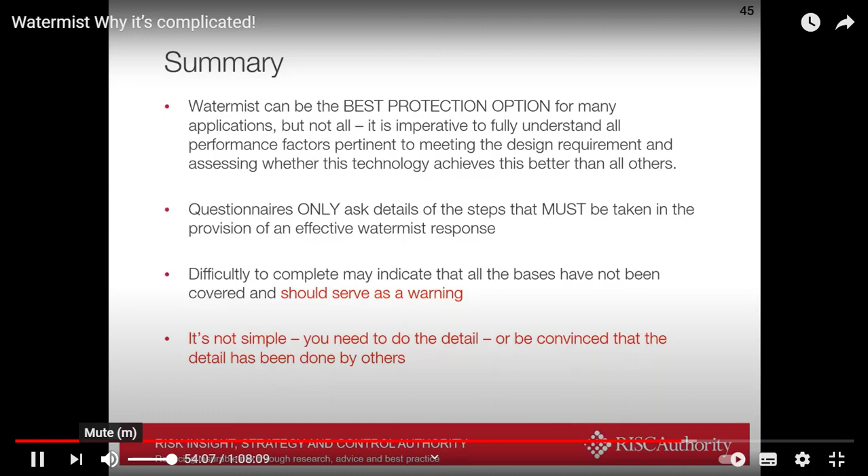So I promised I'd leave you with a few rules of thumb, and these may be slightly controversial, but here we go.

I'd probably sum up by saying that Watermist can be a good option for flashover prevention as a component of life safety provision, and there are some very good domestic and residential applications for Watermist. It can be an excellent local application system for industrial and kitchen type risks, and an excellent alternative to gaseous systems where enclosure integrity can be assured and fires are likely to be large. Where extinguishment of the fire is a requirement, the total design solutions to assure this can be complex, expensive, and may lack resilience unless specifically designed for.

This is the large area where we see competition happening between sprinklers and Watermist systems. When you actually start to fulfill the requirements of building regulations and seek not only equivalency in terms of performance but resilience, we can very quickly see that any perceived cost saving can quickly get gobbled up trying to do the full and proper job.

In property protection applications, FPA questions the use of closed-head nozzles where more than one or two are required to protect the compartment. In small compartments, where you may only have one or two heads which might be bulbed, such as a domestic, residential or hotel type environment, it's probably fine. But to protect large open floor areas with bulb systems, we still think there is more work to be done before that would be advised.

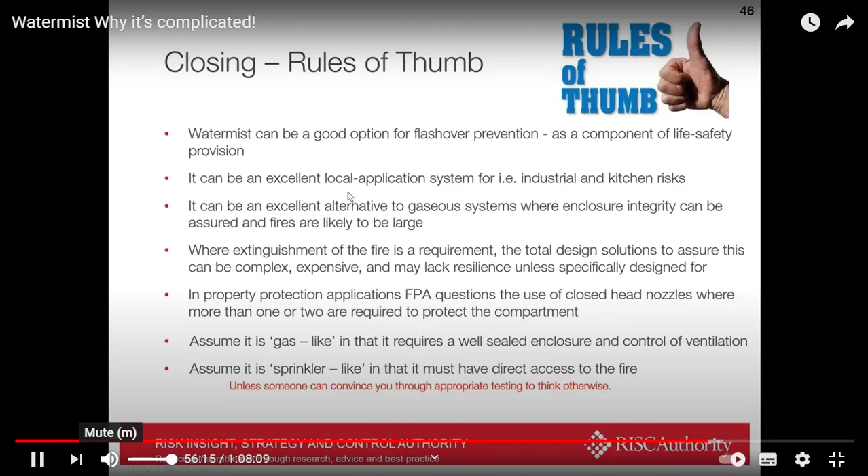Now, I think we've taken the best part of an hour to go through that. I hope it was understandable by everyone, and the slides will be made available on the RISCAuthority website.

Now I do see I have a few questions here. If you'll just forgive me a little, I will try to have a look. I think I've been sent one email—I'm afraid we're all working from home, so let me just have a look at the questions. I think this is where I'll lose the audience if I don't work this out quickly.

What is the maximum open space enclosure that the mist system is suitable for? That's a very good question indeed, and I hope I've demonstrated during this webinar that it's a very difficult one to answer. For a very large fire, it can be a very large enclosure. I apologize, but that's a difficult question to answer straight off. I hope you can see that's why we often need large-scale testing to determine exactly those things, or computational fluid dynamics, which is used increasingly within the marine environment for this.

Can I ask your thoughts regarding modular systems for residential high-rise premises, as Approved Document B both focuses on BS 9251? Now, BS 9251 is a residential sprinkler standard - actually quite limited in height, not necessarily meant for the height of buildings we commonly see it installed into. It's what I would call quite a loose standard, in that it's probably only about 20% sprinkler design.

The other 80% of decisions need to be made by a fire engineer. So anything vaguely complex basically refers you across to looking for additional help from others. However, I think the crucial thing here is to think about the protection you're trying to afford and what you're trying to achieve at the end of the day.

The starting point, particularly in a high-rise environment, is that suppression systems are not a method for making up for poor building fabric and poor passive protection which is missing or non-existent. I would argue that's probably a little more like putting lipstick on a pig. Any suppression system needs a good and appropriate passive envelope to perform within. So correcting the passive envelope is the starting point for all suppression system installations.

In respect of high-rise buildings and Watermist systems, if it's to assist with evacuation, they can be very effective in doing that. As I said, they're very effective at cooling, keeping temperatures low and stopping fire spread.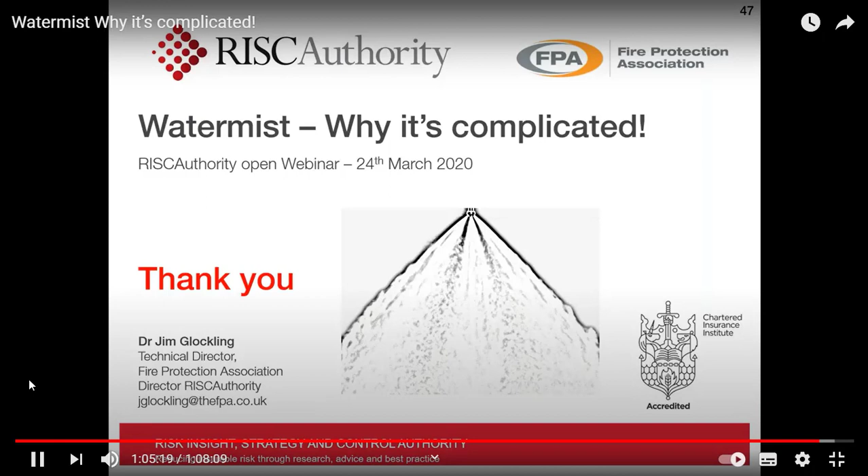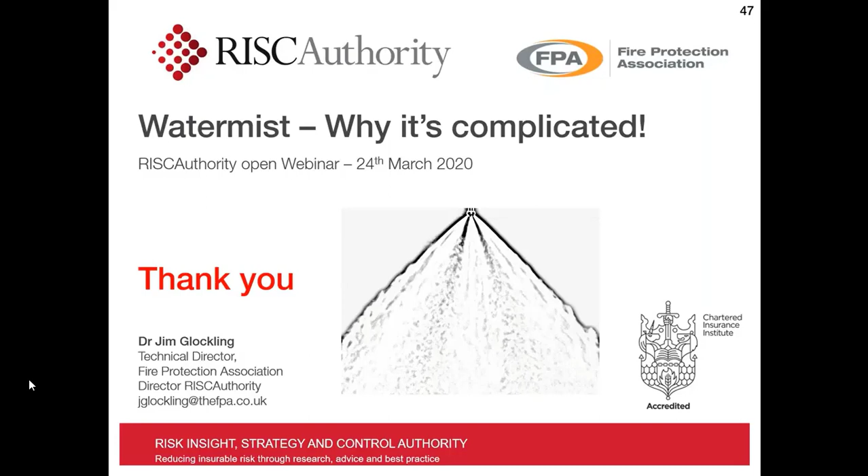If they are looking for a property protection element, because there are some requirements in high-rise buildings to maintain the structural integrity of the building itself, well, that is a different type of system altogether, and even the BS 9251 system would be inappropriate for achieving that. So there certainly is an application in the high-rise...